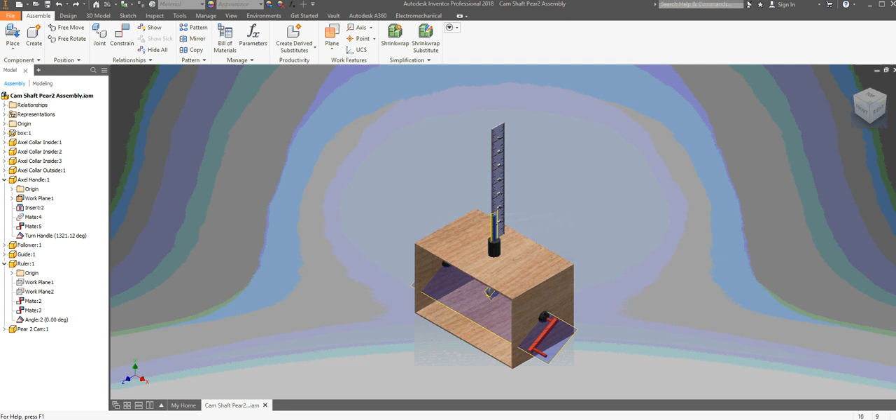Now that we've got our pear cam assembled, we're ready to go ahead and start actually measuring this. So we've got it all assembled, it's all turning. You can see the follower going up and down. We can even move this ruler over if we wanted to. But what I'm going to do is I'm actually going to start this at 0 degrees.

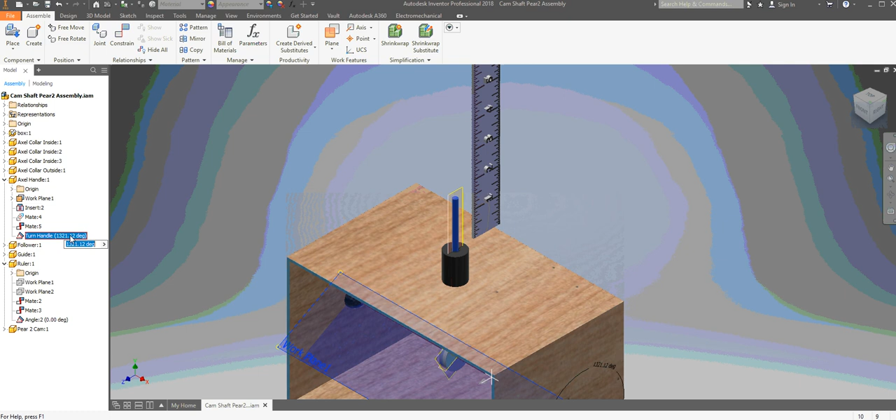So I'm going to go to my turn handle, or you might still have it called angle in yours. But underneath my axle handle, this angle constraint that I put down, I'm going to go ahead and double click on it and change it to 0 degrees. So it's up and down. You can use your ruler in theory. It is measured out perfectly when we built it.

But actually for this, what we're going to do instead is we are going to pull out our measuring tool. So we go to Tools, or Inspect, either or. We're going to go to our measuring tool. And if you hover over it, you'll see it'll tell you the quick command is M. So I just have to hit M on my keyboard, and it pulls that up automatically. Our measuring tool window should pop up on your screen as well.

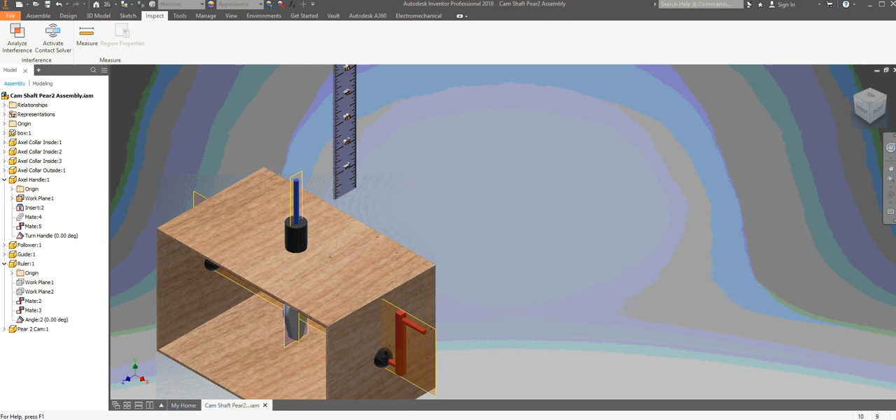And I'm going to click on two faces to measure between. I'm going to click on this face and this face, and it's going to tell me the distance is 1.715. And then I'm going to go ahead and type that in an Excel document. So I'm going to open up an Excel document, and I'm going to widen a few of these columns here, so I have plenty of room for myself to work.

I'm going to name this first column here. It's my pear cam. It's actually pear 2. There's another cam that you can work with later. So I'm going to call it pear cam 2. And then I'm going to make this first column here our angles. And of course, the first angle will be 0.

And then this next one, it'll be distance, right? It's the distance between the follower and our guide, the tip of the follower. So we can call that maximum distance or just distance for short. And what did we get for our measurement when we pulled that up? It was 1.715. And then the next one I want you to measure is 15 degrees.

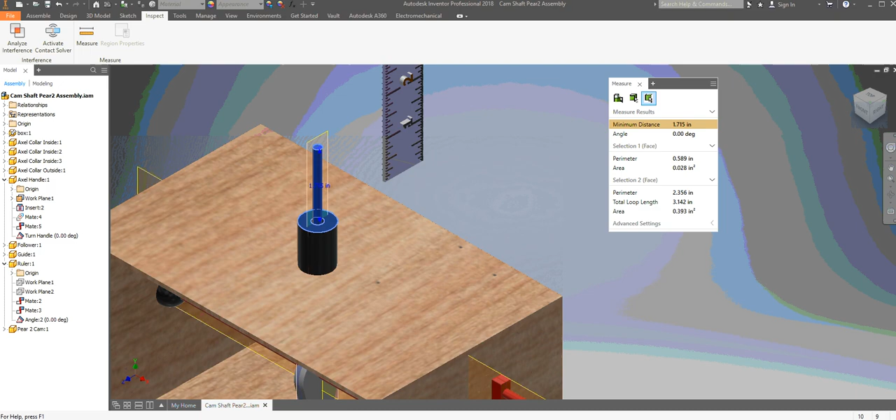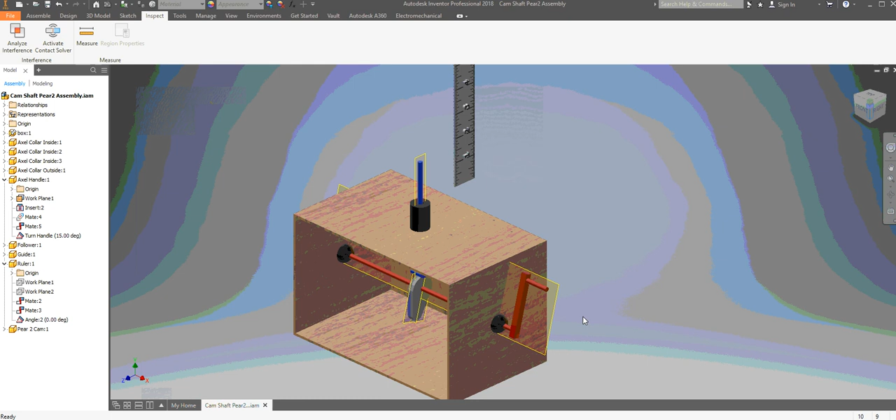So I right click, OK. I change this degree to 15 degrees. And let's see how that changes the measurement. It didn't look like it changed it much. Let's check. So we pull out our measuring tool. We click, and it's still 1.715. So 15 degrees and 1.715. It doesn't change. And if you think about it, as you type in the next one, it makes sense that it won't change. It won't change until we get to a point in our cam that actually lifts it up.

So a further degree down, if we went to, like, 150, you'll see that started pushing the follower up. And I'm going to measure it to show you that it pushed the follower up. Although we're not going to type in this measurement because we're not ready for it. We're still at 30 degrees. But you can see how that number rose up. We're going to get all of them.

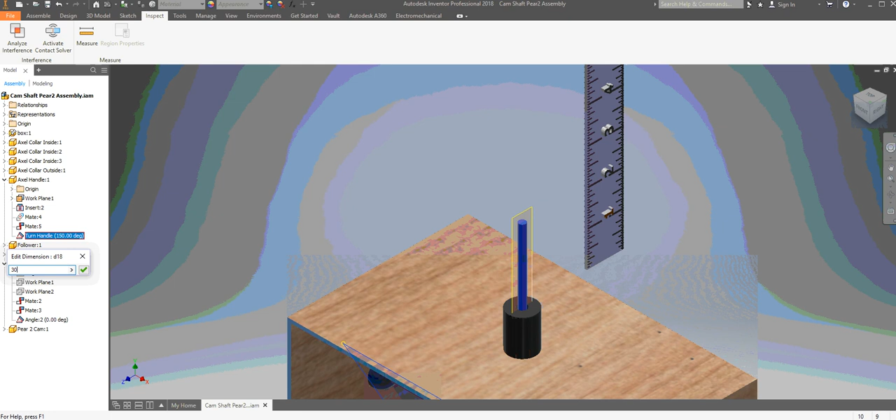So I'm going to go back to, this time, 30 degrees. And let's hit M on our keyboard, or we can just hit measure. And we click and click, we get that distance. It's still 1.715. So we type in 30 degrees, and then we could say still 1.715, and it's going to be 1.715 for a while.

And you might say, well, can't I just fill all these in right now? And the answer is yes. Although at a certain point, you might have to get out a calculator and do the math. Instead of typing it all in, I'm going to type in an equation. I'm going to say equals, and I'm going to equal it to, let's see, this is B7. And as I noticed, it is adding 15 on to each number. So I'm going to say B7 plus 15. And then it does the math.

And you might say, well, Mr. Anderson, that's great, but I have to type that in for every single one. It seems to me to be faster just to do it in my head. But what I can actually do is I can copy this. So I right-click and I copy, and I can actually paste this in. I'm going to hit Control-V on my keyboard to paste, and it'll do the math for me. You notice this one says B8 plus 15, and I do it again, Control-V on my keyboard, and it pastes that one, and it automatically does the math for me.

And I can actually do this for multiple, and you can see it actually filled in all of them by just selecting it. So look what I did again. I selected several in the column, and it kind of senses what I wanted to do. Each one is taking the number above it and adding 15. So you can see this one says B11 plus 15. So B12 will be B11 plus 15. B13 will be B12 plus 15. And then it'll keep going all the way to 360 degrees, which is where we will stop.

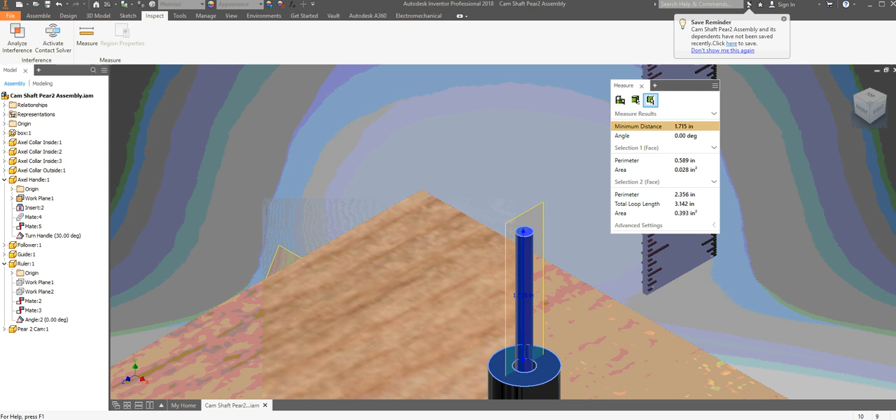And then I will just keep going on. I'll add 15 degrees, and I'll get the measurement each time. And just to make sure, I'm going to make sure they're all 1.715 before I type them in. I'm going to go ahead and fill in the rest of this table. I'm not going to do the whole thing in the video. You'll do most of it on your own, but I just want to show you where it starts changing. So we get to 60 degrees, we hit M on our keyboard, see if I hit the right button. Click and click. It's still 1.715. I'm sorry, excuse me, 75 degrees.

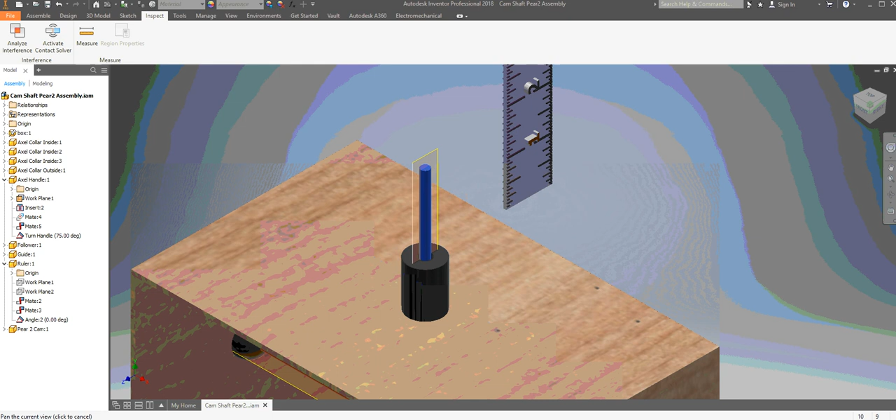We hit M, and actually, I could even make this screen here, and I'll pull Excel back up. I can get a hold of the screen, move it over just a little bit. There we go. I can make this line up here so I can see both back and forth. And so this is still 1.715, which is kind of nice. But then 75 degrees was also still 1.715. And then I'll change it to 90. It looks like it still hasn't changed, it's still 1.715.

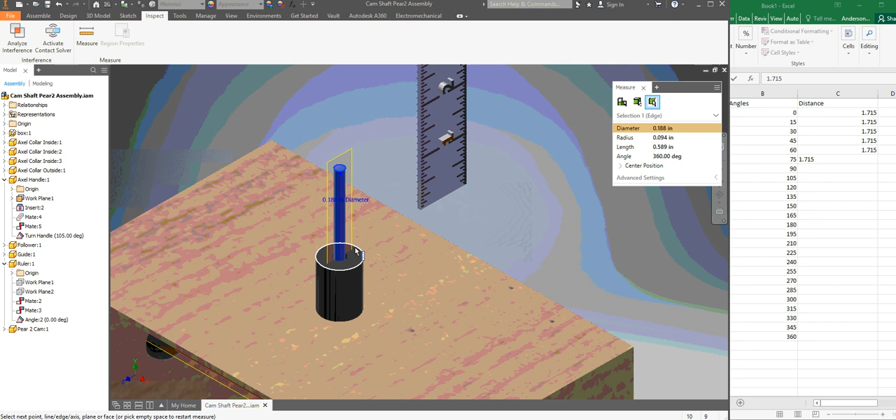So let's go ahead and go to the next one. 105. And did it change that time? Let's see. We do M again. And it's still the same number. Let's try 120. And it looks like I saw it move. Let's make sure. We'll hit measure. And we'll click on both. And you can see that 120 is the first time that number went up. And it went up to 1.745. So let me get that again so we can see it.

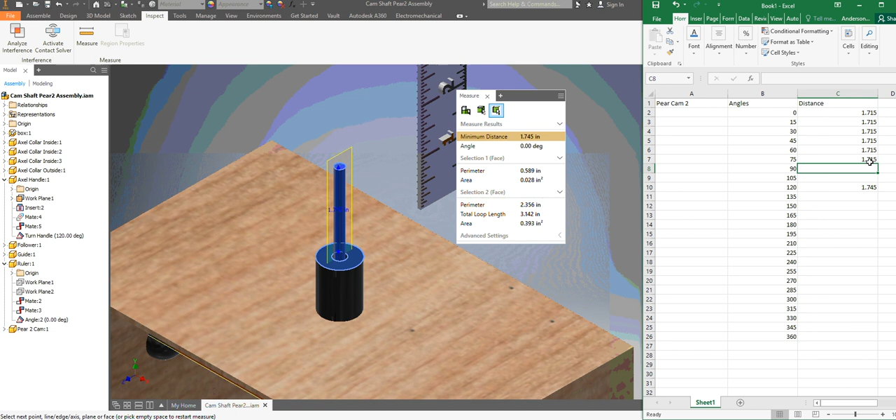Hit M. Measure it. And if I look over, I can still see the number. So I go down to, we're at 120 degrees. So that's 1.745. And these ones are still 1.715, and then I can just go ahead and copy and paste these down, and then I can keep going from there. I'd like you to fill in the rest of this table for the rest of the degrees on your own.